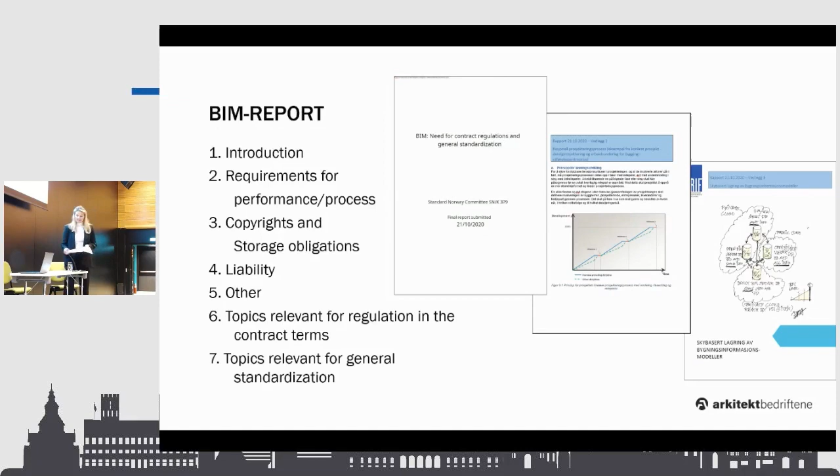So I will already now reveal some of the conclusions. The agreed documents need an update due to BIM, but it's important that the regulation does not prevent development and innovation, as software is still developing and new opportunities come all the time, and it's difficult to foresee future possibilities.

So many of the challenges raised by BIM are best addressed in the appendices—for example, performance descriptions or BIM execution plans—and do not belong in the contract at all. This is due to the fact that much of these topics are specific to the project and need to be regulated in the specific contract for the specific project.

So what the agreed documents need is fallback provisions for when things are not addressed, for example, in the BIM execution plan.

So in the report, the work group has some proposals, and the proposals can lead to 3 types of measures. Firstly, change of terms in established agreed documents or new standard contracts.

Secondly, regulation in contract appendices, typically performance descriptions and processes, usually without standardization because each project has its specifics and special needs. And third, standardization of services and processes related to BIM, but not necessarily within contract terms.

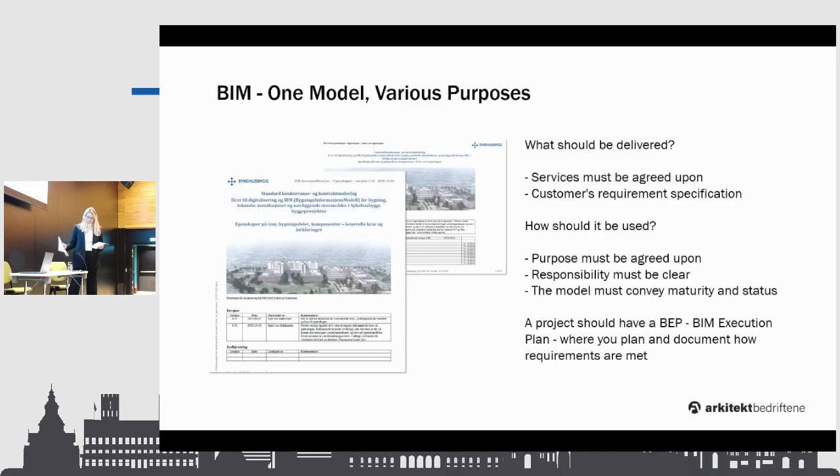In BIM projects where BIM is to be delivered, it's crucial to agree on what the BIM model should be used for. This has significant implications for several key aspects in the contract regulation.

The specific purpose agreed upon will naturally depend on factors such as the project and the client's needs, and therefore they belong in the attachments or the appendices to the contract for each specific project.

In the terms of a standard contract or agreed document, you could have a fallback clause on this matter. It could, for example, state that the model can only be used for agreed upon purposes and regulate what will happen if the model is used for another purpose which it was not intended for.

It should also regulate what happens if you use it for something outside the originally agreed upon purposes, as this could trigger additional fees, deadline extensions, and have implications for responsibilities.

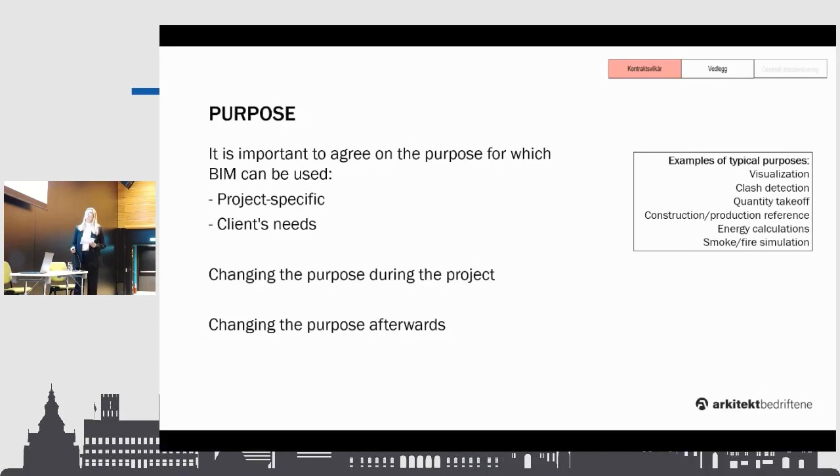So the consultant or the supplier performs quality assurance on the BIM model concerning the purposes it is intended to be used for, requested by the clients, and the requirements in the project for objects, properties, and level of detail.

Additionally, in Norway, the consultant is obliged by public law to ensure the quality of their delivery by identifying, verifying, and documenting compliance with regulatory requirements.

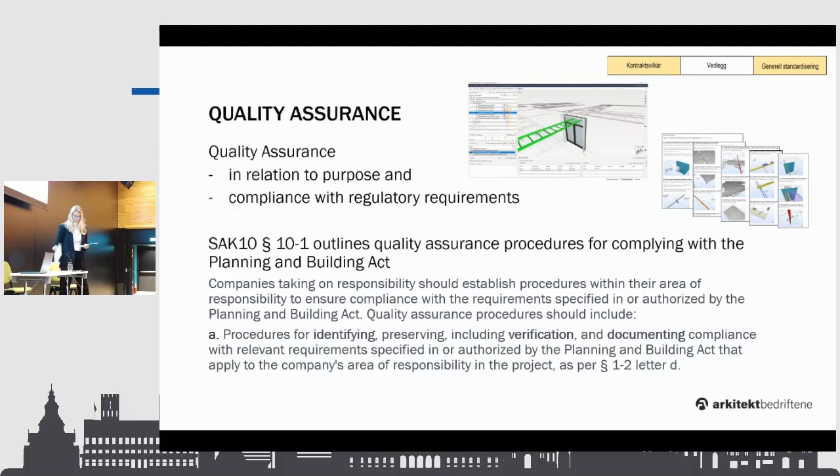The agreed documents are used for projects ranging from very small to very large, and these projects vary in character with different clients' requirements and deliverables. So when building specifications, drawings, and models are available, it's crucial from a contract perspective for the parties to determine which information carrier takes precedence. This topic is highlighted in red.

Normally, and until now, the specifications always take precedence over drawings in case of conflict. What should take precedence between drawings and model will still vary, as the details depend on the project, the contract type, and BIM process requirements.

Giving precedence to the model over drawings would make sense in a project without drawings or in projects where advanced BIM delivery is required, with minimal emphasis on drawings. For projects that primarily request drawing deliveries, it's not practical for the model to take precedence, as this would lead to significant duplication of work and risk of errors.

Therefore, the conclusion is that it's challenging and premature to standardize the ranking between the information carriers. Until we reach a point where the model is the central information carrier, decisions regarding precedence must actively be taken in each project.

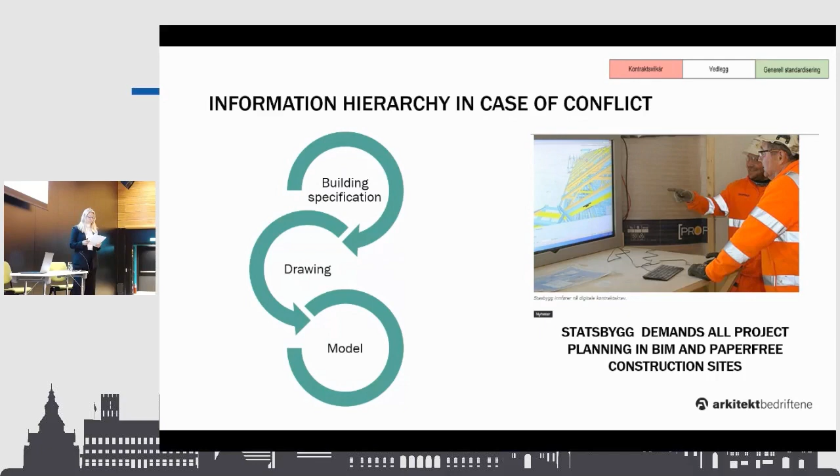BIM is indeed heavily reliant on communication, and it's crucial to establish a common understanding of what is being communicated. In a BIM model, many elements may appear complete without containing all the necessary information, or the information may not have been quality assured for the purpose yet.

The amount of information in a BIM model increases throughout the project, and the model receives contributions from various disciplines. It's exchanged between disciplines and possibly even used on the construction site during construction.

Therefore, it's crucial to use what is known as process status codes, or LOD, MMI, many names again, to indicate what has been quality assured or to show the current status of objects or areas in the model. There are different variations of these codes, but the key is to reach a consensus on which codes to use in the project.

In the report, process status codes are highlighted as one of the topics highly suitable for general standardization, so it's marked red there. It's one of the elements that, alongside a BIM execution plan, has significant potential to address many challenges in BIM projects. The standardization would likely not be at contract term level, but some overarching principle, possibly a separate standard.

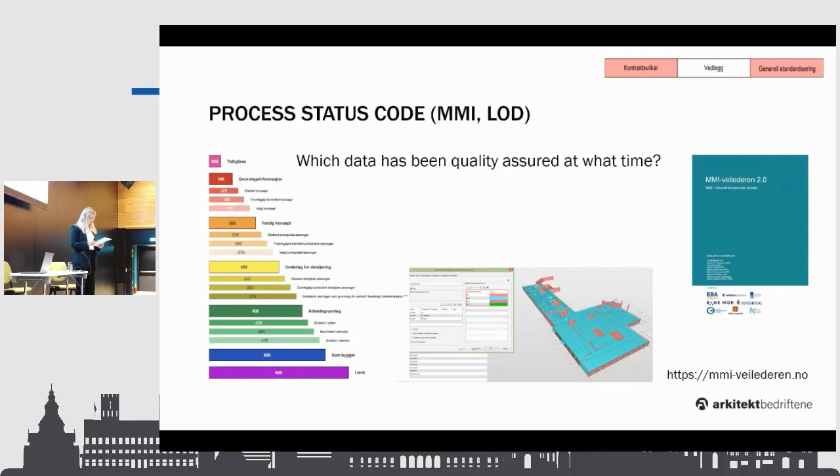The next topic is project materials and intellectual property. In the report, it's pointed out that it's necessary to regulate the rights to the data within BIM. The issues of rights should be included in the contract terms, while technical aspects such as formats, phases, and maturity levels can be defined in appendices for each specific project. Even though there are possibilities of general standardization, the committee has identified this as an important area that needs attention, and therefore it's marked red.

This clause is from our agreed document on consultant services, and it's important to note that this contract is from the year 2010, so it was primarily written with a focus on traditional drawing-centric production and not BIM. However, the work group believes that the existing provisions in this contract can still work efficiently for BIM projects today.

In this contract, the client is granted a right to use the BIM model or all the materials ordered, enabling them to carry out the project and for subsequent purposes like operation, maintenance, alterations, or extensions.

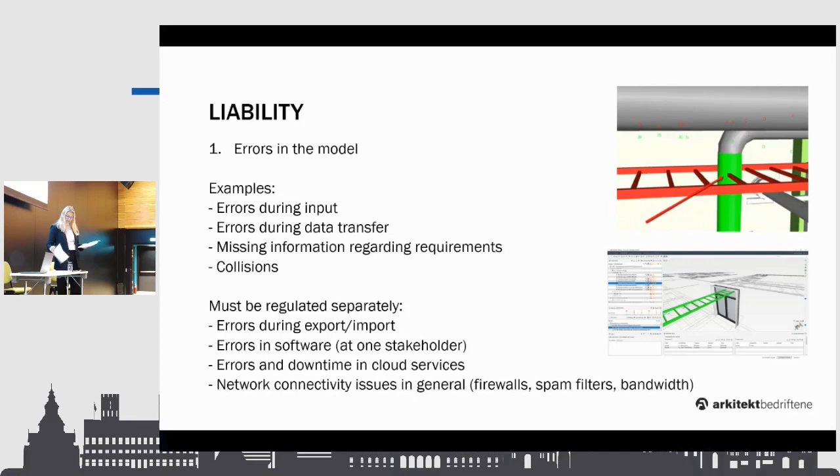And the second type of error is when the original model for some reason changes its state and requires active intervention to be used further in the project.

There can be various reasons for this, such as user errors, of course, issues in data flow or synchronization, errors in program code, problems in relation to databases, viruses, and more.

And these errors can lead to loss of work, time delays, difficulty in assigning responsibility for the errors, and inability to downgrade the models, for example to save them in a previous version without the error. In the worst case scenario, the model may need to be completely reestablished, with all the consequences that might entail.

And the last category of errors described in the report is when the model contains more information than it should, or when the information in the model is used for purposes beyond the intended use, leading to errors. Who is responsible for this excess information?

Both the client and the supplier have a common interest in ensuring that the delivery meets the client's requirements and specifications, and that the content is quality assured and can be used as intended. And this requires action from both parties.

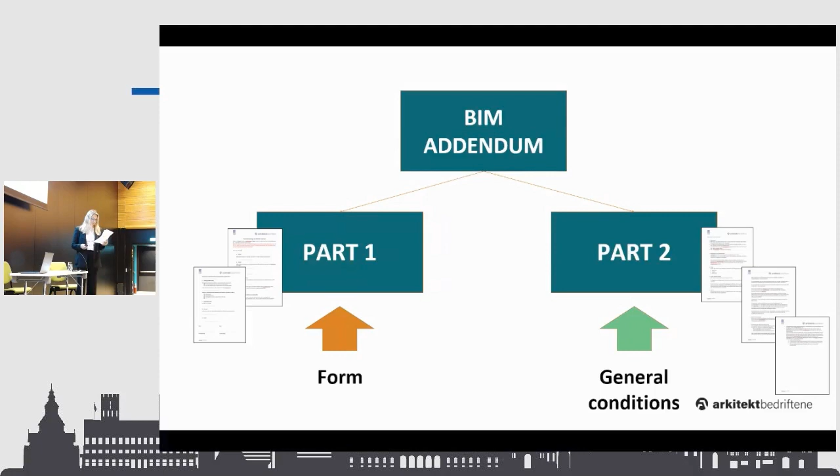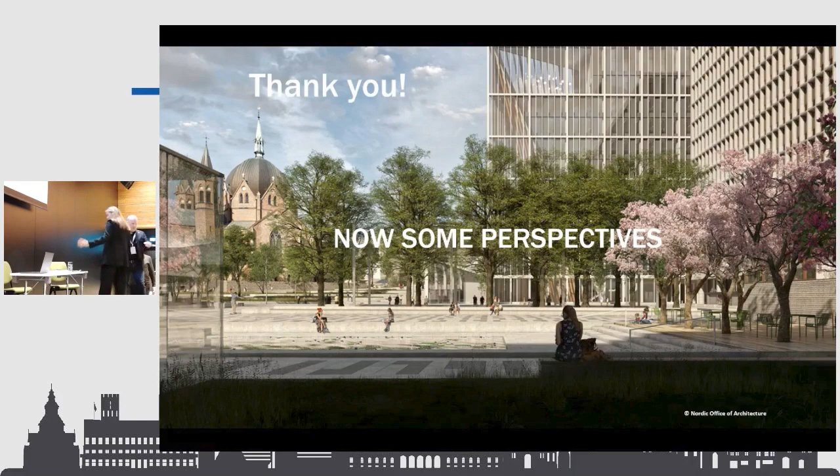So now we have some interesting views from Steen and Morten, who will join us. I don't know if you want to... I don't know who's first. Should we just present ourselves?

Yeah. My name is Steen Sunesen. I work in Statsbygg. My name tag here says I work in buildingSMART Norway. That's true, I'm rented out to buildingSMART Norway. So at the time being I shouldn't actually be representing Statsbygg, but I'm representing what I said back then while we made the report. So, should I take the first one here? Yeah, or no, it's not the first one. Yeah, this is the first one.

Okay, I'll just introduce myself briefly. My name is Morten Ræder. I'm an architect at Nordic Office of Architecture, which is one of the largest, if not the largest, architectural practice in Norway. I've been working with BIM since 2008, on large-scale and small-scale projects, but mainly larger, more complex ones in the last 12 years. I'm also part of the BIM task force group of the Practicing Association of Architects in Norway. I haven't been part of this particular work group, but in the background, discussing the topic with Anette regularly.

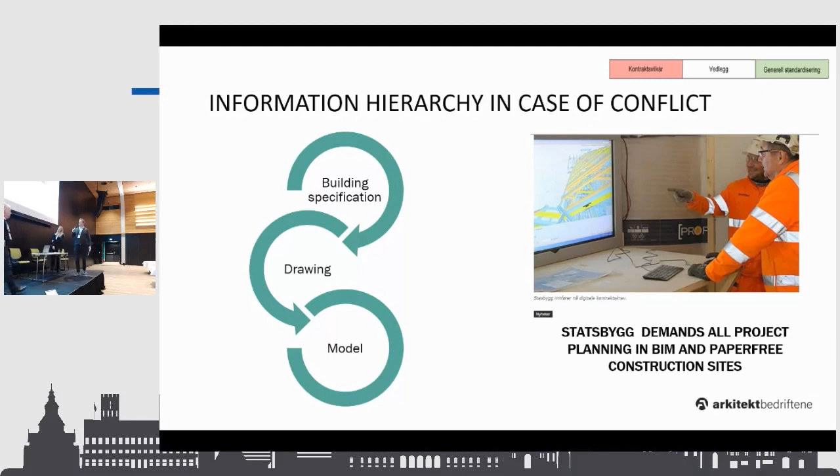So, Steen, you'll take the first part here. Okay, thanks. I forgot to say that Statsbygg is the Norwegian government's client and owner organization. We're one of the largest public clients and owners in Norway, at least for buildings.

We tried to take some of the topics that were mentioned and give some input from the discussion we had. We still have those arguments, which often have to be regulated in appendices, and often have to be regulated for the specific project. Also, as clients, public clients do not have the same view. There was one slide you showed that was from another client, I think I can say it, the National Hospital client. You didn't write it, that was polite. They are very strict, they actually demand full ownership of the model. In Statsbygg, we do not do that. We follow a different approach, we want to be allowed to use the model for the entire life cycle of that specific building.

We will not typically, and we never actually discussed, using a model and simply copying it somewhere else. We don't provide objects from one model to others and so on, so we don't share data that way. That being said, as a public client, we are for sharing data. We think it's good on a societal level, and it's kind of one of the basic points of digitalization, that we have a much easier time sharing data. I think that is a basic premise that we support, and that's forming our policies towards how we require BIM.

This one is actually about the hierarchy of information. We would prefer that actually it was the BIM on top, because the building specification and drawings and many other reports and such is actually today in many projects derived from the model. So the model is actually the bearer of most of the information, is the source. So we want things to change there.

The trouble is that the way of working and also software is an obstacle on using model as a contractual document. Instead of that, you have a model and then you make some reports with specific interpreted information that can be used as a document, as also a contractual document, legal binding document, as a drawing or building specification.

You just hand over the model, or you share the model, which may be alive, and then it's up to the contractor or whomever who's going to use the information to interpret it themselves. That gives them the responsibility. And how we are regulated responsibility between us, the different parts of the industry, is actually an obstacle.

Because today it's actually the architects and engineers who are responsible, for example, for measuring and making such interpretation, making production plans. That will actually change, so the contractor would be responsible. The contractor does not want that responsibility today. So that is another thing we haven't regulated, and that's why we still have drawings on top.

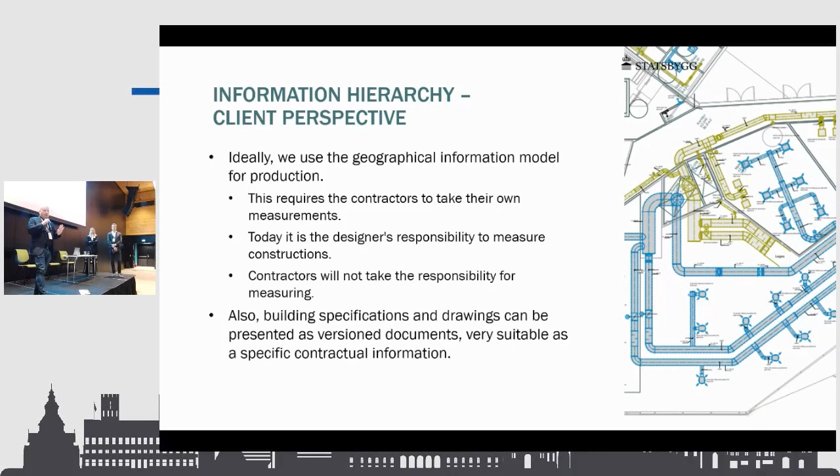Because I went through this with them, and they told us, look, I need this information so I can see it all at once. I can get the same information in BIM. They use BIM, but it takes like 1,000 clicks to get all the information. So without an interface that is actually usable for them, it's difficult. I think that kind of covers this slide.

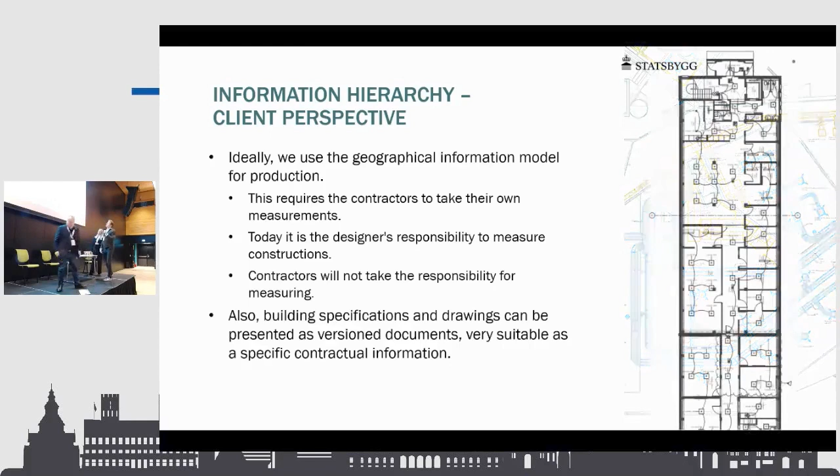Yeah, I think you touched upon, click one. Next one. Yeah, I think you mentioned it, that it's not because of our unwillingness to use the model or put the model in the center or on the top of the hierarchy.

It's because we just can't rely on it, because the tools we use to create the models are just not mature enough. There's no way for us to properly verify that all the information we put into the models is kept there in the precise way that it was put into there, and also quality checked. There's no way to freeze information regarding the model for the entire life cycle of the project, for example.

It's so easy that relations are broken, and there's way too much that can go wrong, and this is something that leads us to default to the drawings, because the drawings are a cut in time of how the model looked at the precise moment, which means it's also much easier for us to quality control what's on the paper or in the PDF.

You can do the same in an IFC export, and we do that, of course, but still to control the information in the IFC export is extremely hard because of the tools we use.

I mean, most of the design tools today were created back in early 2000, and it was created mainly to automate or make drawing production faster and more reliable, so that you wouldn't have discrepancies between, for example, a cut section or an elevation and a plan. The door would stay in the same position and would have the same measures for all those drawings. And it was not so focused on the information you put into the model.

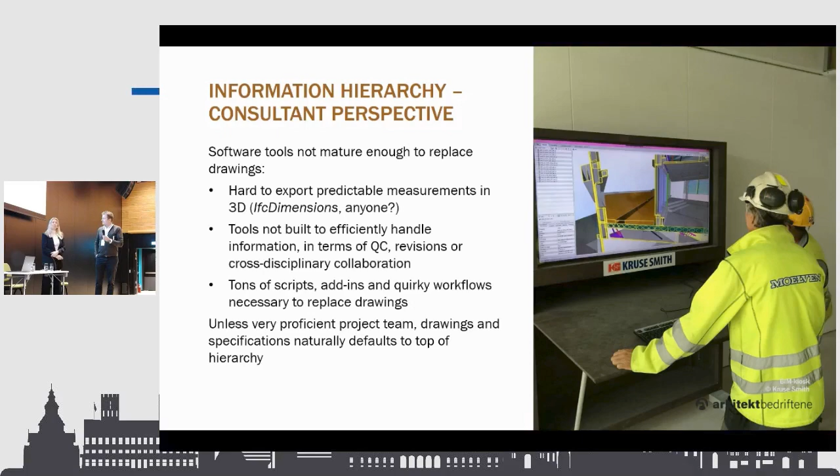Yeah. And the next one you touched into already, Steen, a little bit.

I think, as I said before, reuse of information is one of the main reasons why we want to digitize, and we think of it in a life cycle perspective.

We are among those clients who are against setting up restraints. That goes both ways. We in Statsbygg don't want to go so far that we're restraining the designers who handed over the project, so that they're not allowed to reuse the information they have, for example an object library, in their next project. I think that's ridiculous, a restraint that has no point. But of course we also need to be able to use the information we paid for, within reasonable limits, not just make a copy somewhere else, but to use it for different purposes, even purposes other than intended.

Of course we bear the responsibility for use for other purposes. The discussion, as I remember it, was mainly on a smaller level, not so much building design, but more like objects themselves, because developing objects, especially in a complex building with a lot of special equipment, takes up a lot of time. It provides a lot of value, but we paid for it, so we want it and want to be able to use it. But architects and engineers, of course, should be able to use it as well.

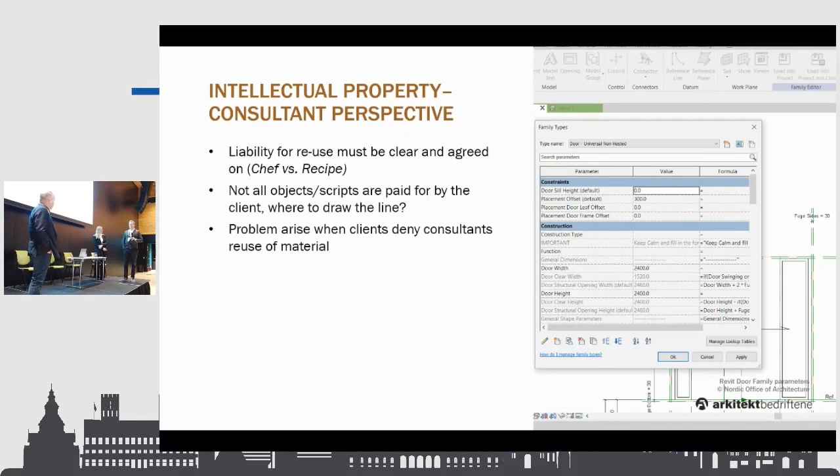But I think the problem— if you can continue, perhaps. No, we're not on liability, but I think that's where the problem arises. We want to get to liability. That's fine. Yeah, we don't agree there.

Absolutely, I don't think I have anything more. I want to get to the liabilities. Yeah, there's just one wish I have for buildingSMART.

If we're moving everything to the cloud, which I think is a prerequisite for moving the industry forward, creating the tools we need for multidisciplinary object relations, having communication and everything in one platform, then I also think IFC as a file format just doesn't cut it when it comes to archiving a project. You need an open database format instead of a file format, a format for offlining, downloading and archiving, but also for offline purposes, for classified projects that can't really use cloud solutions.

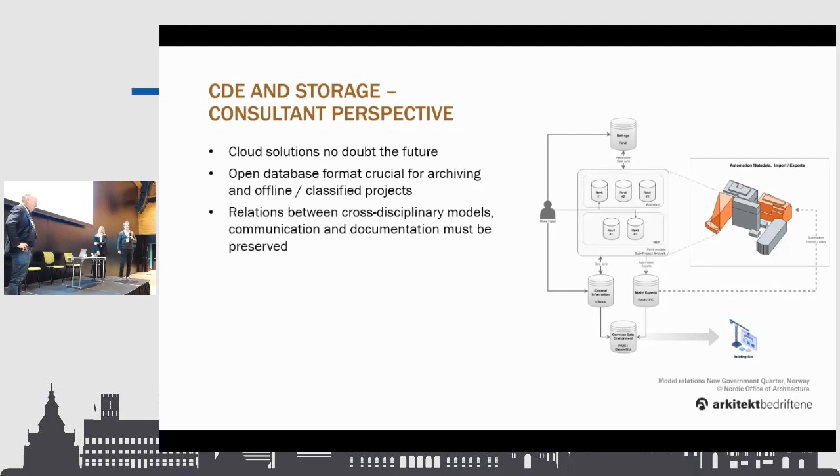In this one, I just want to share this with you. Many of you are probably aware of it, but what a BIM is - it's a use of shared representation.

And another thing, especially the last point, is that information has three kinds of perspectives: geometrical and alphanumerical, and then you can have information that is documentation outside the traditional geometrical model, but is actually part of the information model in a larger scheme.

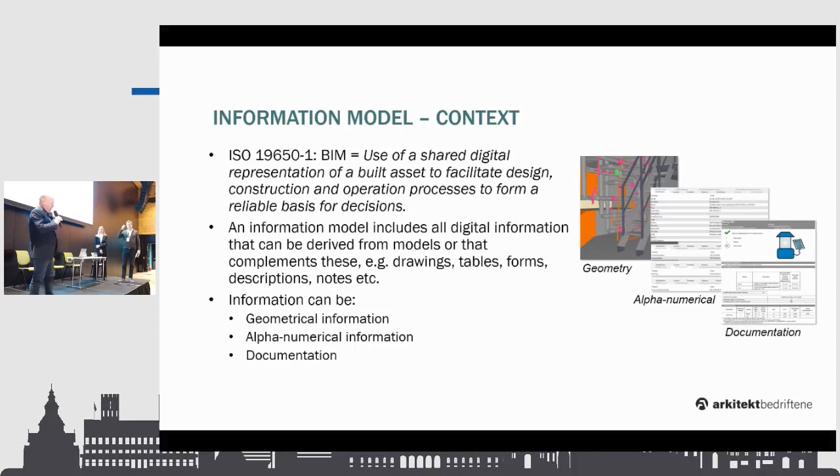I don't know if you have the next page. Now, okay, that was included because differentiating between the geometrical and alphanumeric information is, at some points, actually important to have a sense of, because when it comes to liability, it's very much the alphanumeric information that is our focus here.

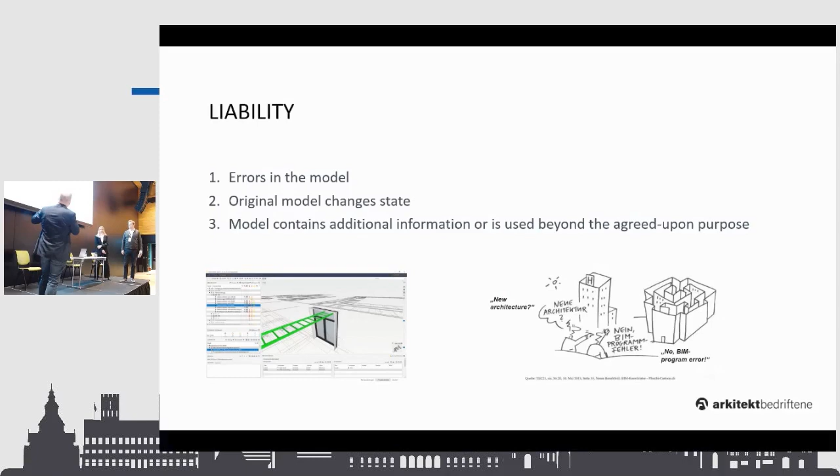You wanted to add something here on liability, because it was just a precursor to that. No, so we can just take the next one. So this is, I guess, where we do not always agree. As you heard, Anette said something about specifying purposes, and the purpose can be for the project and for the client.

I represent a client who, yes, we do explain purpose, but we also have a very specific specification for which information to deliver, mainly alphanumeric information that describes, identifies, classifies. And that is very important for us. So for us, it's actually quite easy to see if a delivery is according to our specification or not.

Of course, to the agreed specification, because it's not a set requirement for all projects - it's a template we specify based on different project needs. But it is very specific. Many clients do not have that. If they only have a very overall purpose-specific scope - cross-disciplinary coordination, energy analysis, cost estimation, maybe two more - then it's actually up to whoever to specify what is actually included in that purpose.

What can you expect to get at handover? Because if the client is not very specific, it may actually be up to the designers to specify it. And then you don't really have anything to say afterwards, because they can always say, yeah, but this is the information we used. And of course they're right in their sense, and maybe you had other expectations.

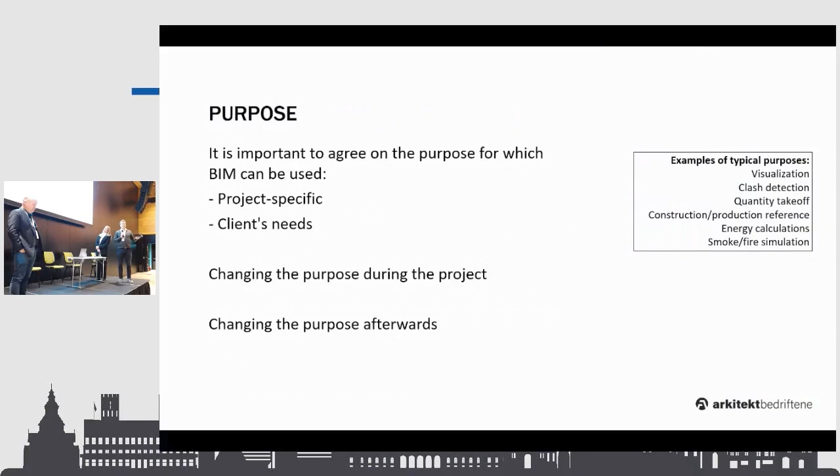But ideally, I would like to agree with you. I mean, I would definitely myself like to be 100% sure that the models I send out to Steen will contain no errors and will be completely checked for any information that's in there. But we all know that the software we use introduce bugs in export. It's also very hard to find the small errors or deviations lying there. It's time consuming, and something that, on a tight deadline, you're not able to assure that every aspect of the model is controlled at any given time.

In order to prevent that, I think it's really important that we can agree on mapping, for example, use cases against object properties or property sets, because Steen has done a tremendous job creating the BIM manual specifications for Statsbygg. But for the end user it's a little hard to use, because it relies heavily on IFC standards, and we need to translate that into localized language and something our end users understand.

So when you bring the model to the architects and engineers, and eventually to the building site, they will automatically or intuitively understand what the properties they look at represent. And also for mapping it to use cases, we know that we can agree on specific sets of properties that we need to check, and that every engineer and architect on the design team are keen on looking at those properties before they send out the models. And that can be